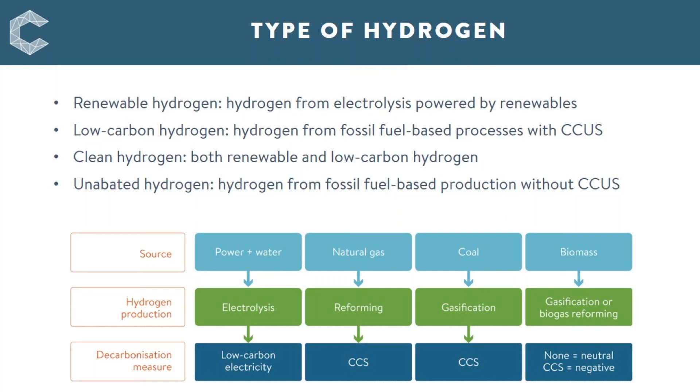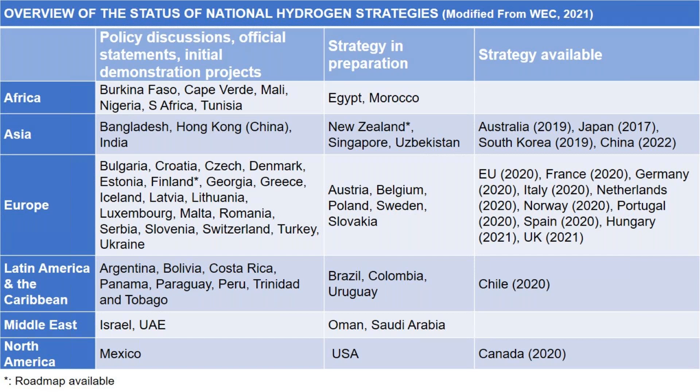Currently, hydrogen is mainly used as a feedstock or reagent in refinery, chemical production, and steel making. Hydrogen can replace fossil fuel as a feedstock or as a fuel to decarbonize the hard-to-abate industrial processes such as smelting and cement production, and facilitate different types of chemical reactions such as production of liquid fuels and chemicals by hydrogenation of captured CO2, which potentially has a huge market.

Hydrogen and hydrogen-based fuels can also be used in transport, including long-haul and heavy-duty transport, rail, shipping, and aviation, in the power sector and in buildings for heating. Hydrogen uptake has already begun in transport and power sector with fuel cell development, the pilot projects of injecting hydrogen into the gas grid for home heating and co-firing hydrogen with fossil fuels for electricity generation. However, the adoption of hydrogen for new applications has been slow.

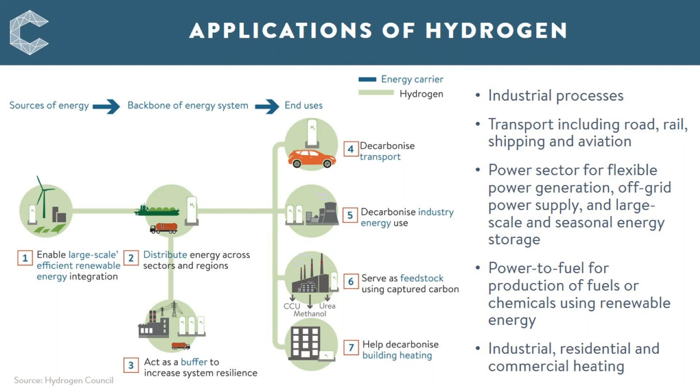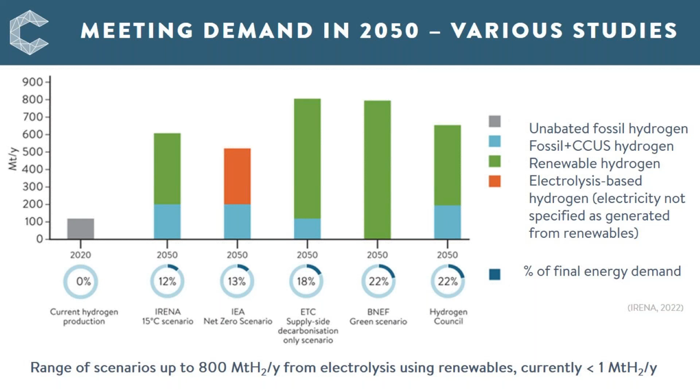There are 3 established technical routes for hydrogen production. Currently, natural gas reforming accounts for about 62% of the 94 million tons of global hydrogen production. Around 19% of hydrogen is made by coal gasification, almost all unabated. The rest is mainly produced as a byproduct from refineries and the petrochemical industry. Less than 1% of hydrogen is from water electrolysis. Depending on the technologies used, the cost and the carbon footprint of the hydrogen produced vary significantly.

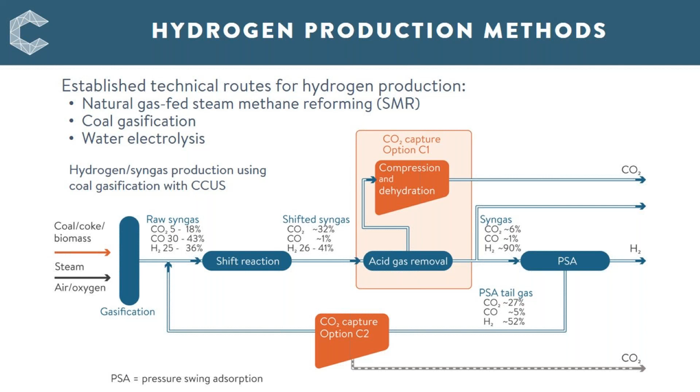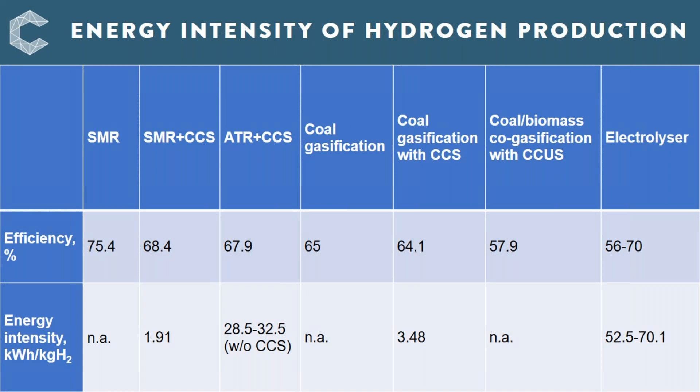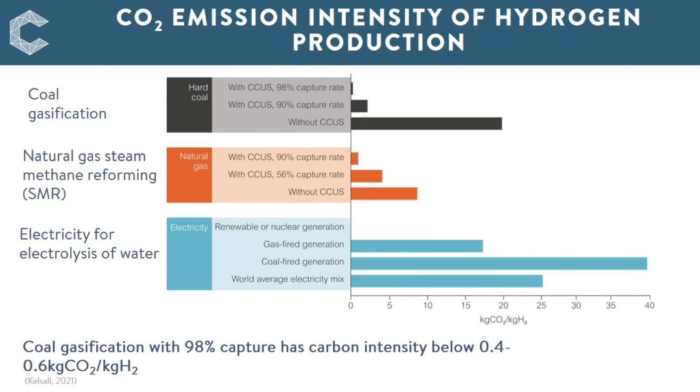CO2 intensity of electrolysis depends on the CO2 intensity of the electricity input. While electrolyzers powered by 100% renewables emit no CO2, electrolyzers driven by grid electricity that has a large proportion of fossil fuel generation would result in higher carbon emissions than directly using natural gas or coal for hydrogen production. Similar trends have also been reported by the IEA and Hydrogen Council.

Water is consumed in hydrogen production processes as the feedstock and for cooling. The processed water must have high purity, which generally requires pretreatment and consumes additional water.

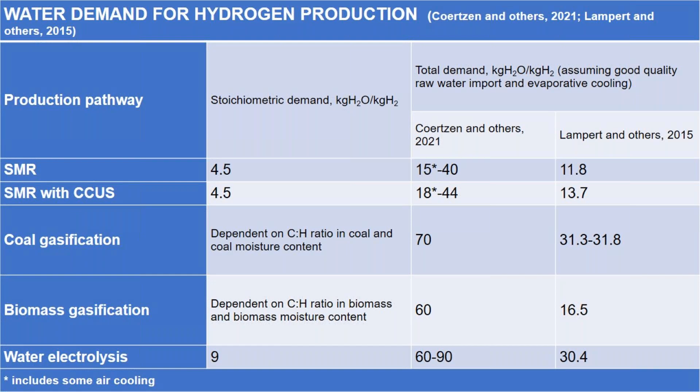The footprint of hydrogen plants with different pathways is compared in the table on top of this slide. It shows that an electrolysis hydrogen plant has a footprint comparable to that of natural gas reforming with CCUS and smaller than the footprint of a coal-based hydrogen plant with CCUS.

However, renewable hydrogen production requires sufficient land to host the wind and solar generation capacity. When taking into account the land requirement of a renewable power plant needed to drive the electrolyzers, the picture changes drastically. The bottom figure compares the land area required for production of 1.76 million tons per year of hydrogen from coal or gas with CCS and electrolyzers powered by renewable electricity. So it shows renewable hydrogen production needs substantially larger land areas.

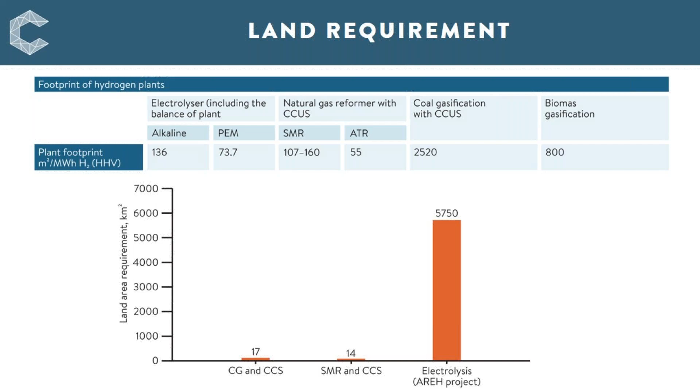In addition, construction of solar and wind power plants requires a great deal of materials. This slide compares the material required for coal and natural gas combined cycle power generators and for solar PV and wind power generators. Solar and wind power plants use significant quantities of cement, concrete, glass, and steel. Production of these materials contributes to substantial CO2 emissions.

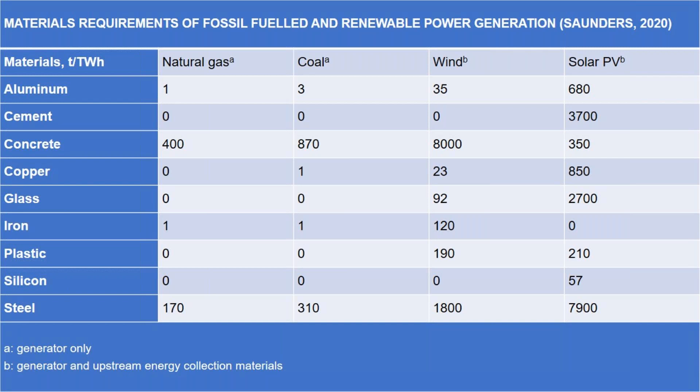Apparently, renewable and low carbon hydrogen production all have direct or indirect impacts on the environment. Analysis of life cycle environmental impacts shows when best available technologies are adopted, low carbon hydrogen from coal and gas could have a similar or slightly larger carbon footprint compared to renewable hydrogen. Therefore, low carbon hydrogen from coal and gas can support the clean energy transition.

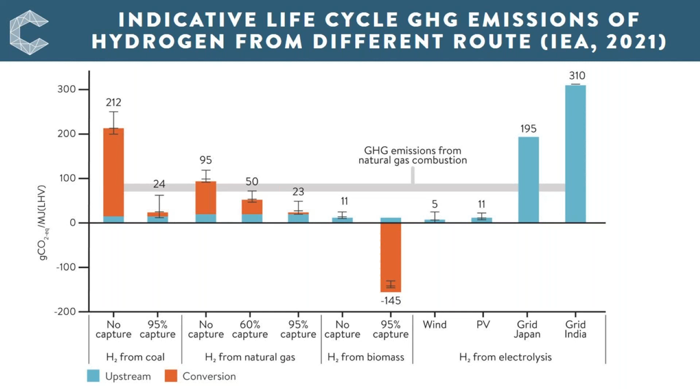Besides producing it, technologies and the infrastructure for storing and transporting hydrogen will be critical for large-scale hydrogen use. Hydrogen can be stored and transported by various means, either in a gaseous form under pressure of 35 to 70 megapascals, or in a liquid form at temperatures below minus 252.8 degrees C. An alternative is to convert hydrogen into a hydrogen carrier, which is liquid at ambient temperature and pressure, such as ammonia, so it is easier and cheaper to transport or store.

Ammonia is a well-established hydrogen carrier with a volumetric energy density nearly double that of liquid hydrogen. Ammonia can also be combusted directly as a fuel in some applications without needing to be reconverted back to hydrogen, reducing the related energy loss and costs. Ammonia is already an internationally traded commodity, and the infrastructure is in place.

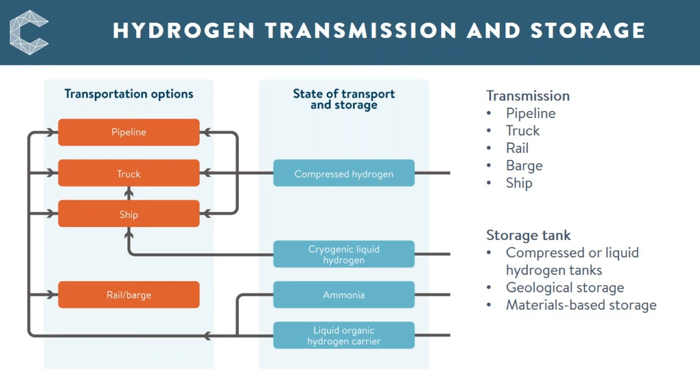The cost effectiveness of various hydrogen transport options is determined mainly by distance and volume. The low energy density of hydrogen means it can be very expensive to transport over long distances. This slide shows the estimated cost of hydrogen transmission via different modes. For long distance transport, shipping will be cheaper than pipelines.

Currently, it is only possible to transport relatively small amounts of liquid hydrogen by ship, and the existing infrastructure for hydrogen storage and transport is lacking. Therefore, in the near to medium term, the scale of long-distance hydrogen transport will be limited, but international trade and transport of hydrogen in the form of ammonia will increase.

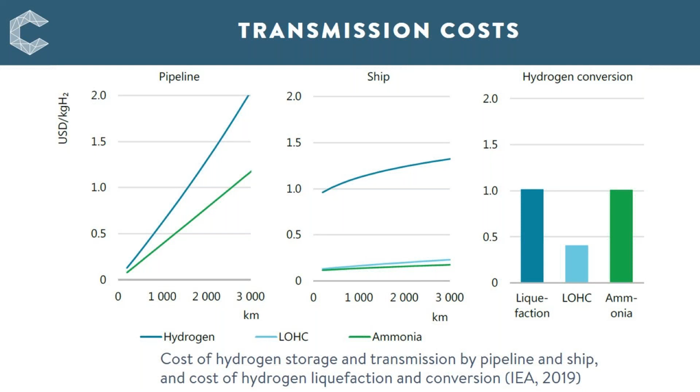Due to the difficulty and high cost of hydrogen transport, many new projects will be developed in industrial clusters with end users on site or close by to minimize the cost. This will require the production of clean hydrogen from diverse sources linked to the different available resources in different regions. For countries heavily dependent on coal, such as China and India, hydrogen production from coal with CCUS will be vital to meet their increasing domestic demands.

For other countries that have abundant renewable and fossil fuel resources, such as Australia and the US, coal could provide a source for cost-competitive low-carbon hydrogen production for domestic and international markets. Europe and Japan will be major demand centers for clean hydrogen, but lack resources and will be hydrogen importers. Middle East countries have enormous renewable and fossil resources and could become a major player in clean hydrogen supply.

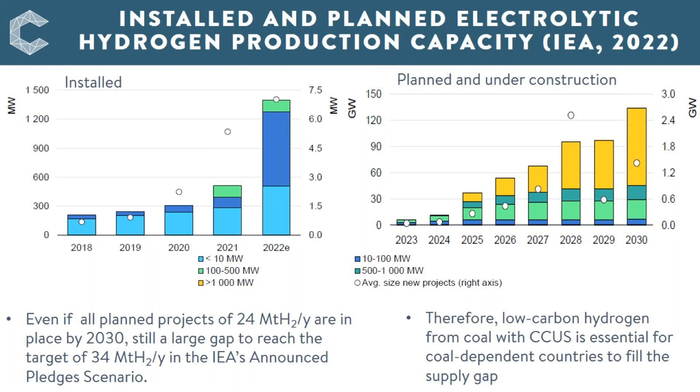In addition, hydrogen is much more expensive than fossil fuels it is to replace. Hydrogen production from coal with CCUS has a significantly lower cost than renewable electrolytic hydrogen, typically by a factor of around 3, as shown in this slide. For countries with abundant coal but limited gas resources, such as China and India, hydrogen from coal with CCUS will have the lowest cost compared to hydrogen from gas with CCUS and renewable hydrogen. This economic advantage will continue to 2030 or beyond.

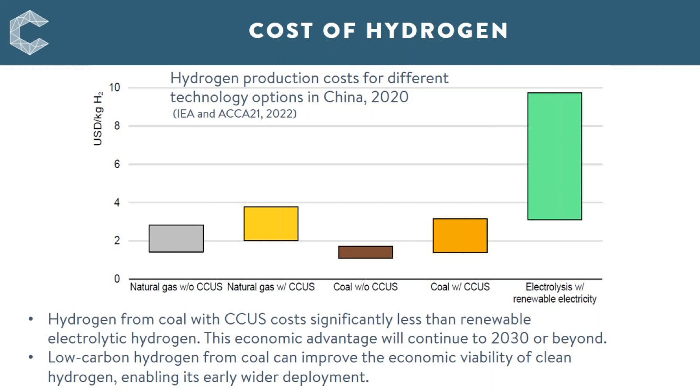Therefore, hydrogen from coal with CCUS can improve the economic viability of clean hydrogen use, enable its early and wider large-scale deployment, and facilitate the transition towards renewable hydrogen use in the longer term. For coal-dependent, large hydrogen-producing and consuming countries, such as China and India, coal provides not only the cheapest source, but also a secure and reliable supply for hydrogen production.

For coal exporting countries such as Australia, Indonesia, and the USA, producing low carbon hydrogen and hydrogen-based fuels such as ammonia from coal can offer a suitable replacement for the current income from fossil export and provide the end users with options of clean hydrogen at low and stable prices. Renewable hydrogen needs vast areas of land to host the wind and solar power generation capacity, which can be an issue in some areas, especially in densely populated countries. For regions where low-cost land or excellent renewable resources are not available, but coal and carbon storage sites are, low-carbon hydrogen from coal with CCS will clearly be the best option.

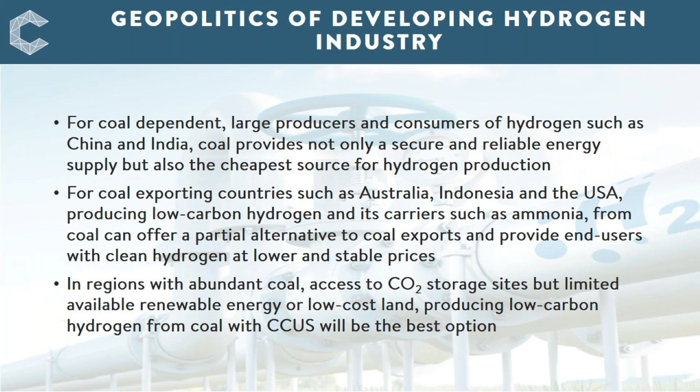So this led to the key messages from this study. Hydrogen from coal with CCUS can have low life cycle greenhouse gas emissions that are comparable to renewable hydrogen and outcompete hydrogen from gas SMR with CCUS. So it can support a clean energy transition. The global demand for clean hydrogen cannot be met by renewable hydrogen production, at least in the short to medium term, and therefore low carbon hydrogen from coal and gas with CCUS is essential to fill the supply gap.

Hydrogen from coal with CCUS has a significantly lower cost than renewable hydrogen and can improve economic viability of clean hydrogen use, enable its early, wider deployment, and facilitate a transition towards renewable hydrogen use in the longer term. Hydrogen production will mainly be a local business requiring different resources available locally. For emerging and developing economies that depend on coal, coal is indispensable in providing a secure, reliable energy supply and an affordable source for clean hydrogen production.